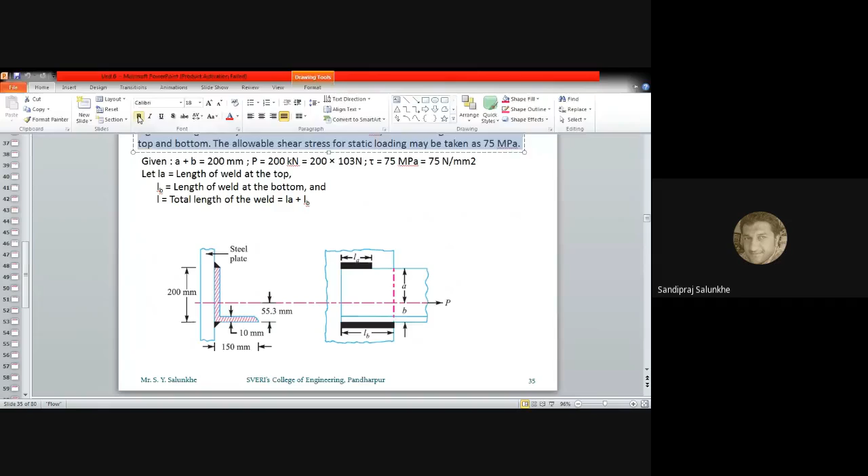So in the statement it has been stated that a 200 by 150 by 10, that is 200 length, 150 width and 10 millimeter thickness angle is to be welded with the steel plate by fillet welds as shown in figure. Here it has been shown. If the angle is subjected to static load of 200 kilonewton, find the length of weld at the top and at the bottom.

That means we have to calculate LA and LB. The allowable shear stress for the static loading may be taken as 75 megapascal, that is, the allowable shear stress of that welding is 75 megapascal, and we have to calculate what will be the length of that weld.

Now here it has been given that A plus B, that is nothing but total width, is equal to 200 millimeter of that angle, whereas the P, that is load which is applied axially, is 200 kilonewton, that is 200 into 10 raised to 3 Newton. Allowable shear stress is 75 megapascal, that is 75 Newton per millimeter square.

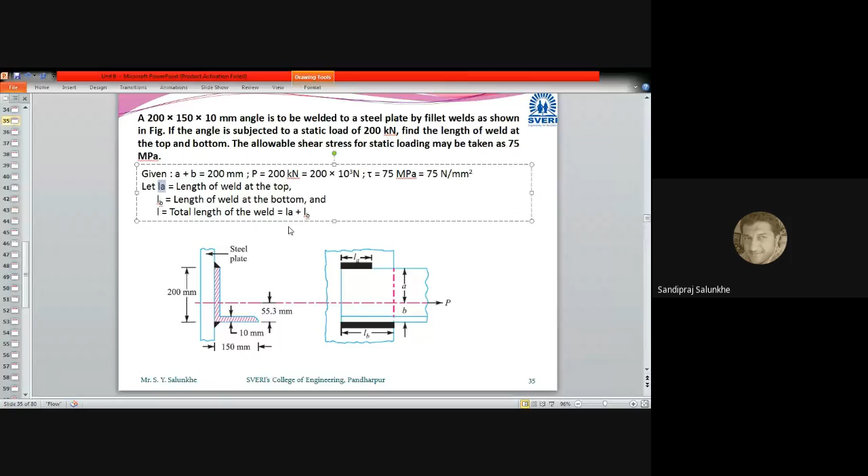Now we consider this LA as a length of weld at the top and LB as a length of weld at the bottom, and L will call it as LA plus LB. Now this is the schematic diagram of that stated problem. In this diagram we have to calculate LA and LB, or if possible we'll calculate LA plus LB, and from that we'll calculate LA and LB by considering any one.

Now we'll take the thickness of that angle as 10 millimeter, as it has been stated in the problem. Therefore, the size of weld which we have to calculate, S is equal to 10 millimeter. And later on, we will calculate the T, that is nothing but...

Is there any problem? Sachin Kengar, Sachin Kengar, can you unmute yourself? Hello, Sachin Kengar. Can you unmute yourself? What is your roll number, Sachin Kengar? Hello? Can you hear me, Sachin Kengar? Okay, later on I will come to know.

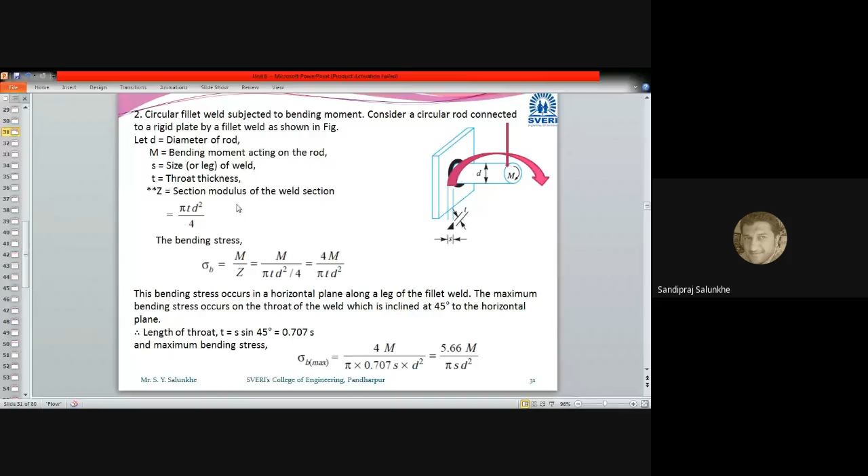So when we are going to calculate this T, that is the throat thickness.

So we have to calculate the parallel weld, and the formula which we have derived for the parallel weld is that P is equal to 0.707 into S, size of weld, into L, total length of that weld, into shear stress. That is, stress is equal to force divided by area. Area which we are going to consider is T into L, that is throat thickness into length of that weld, and allowable shear stress is tau.

So when we are going to...

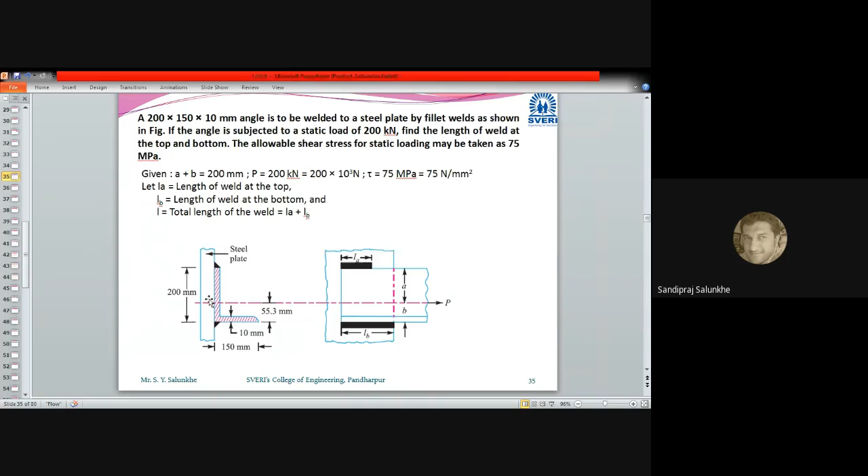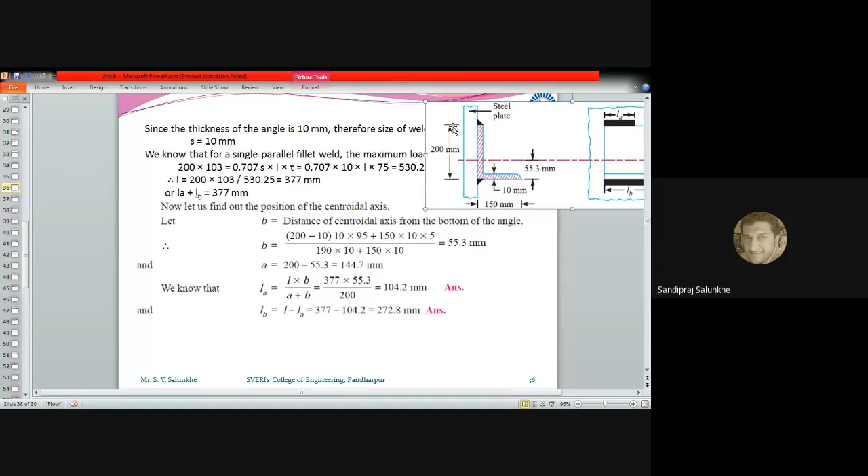I'll take this diagram for reference on the next slide. So this B we have calculated as 55.3, and A can be calculated from the higher end, 200 minus this 55.3. So this A and B we have found out, that is we have located the centroid.

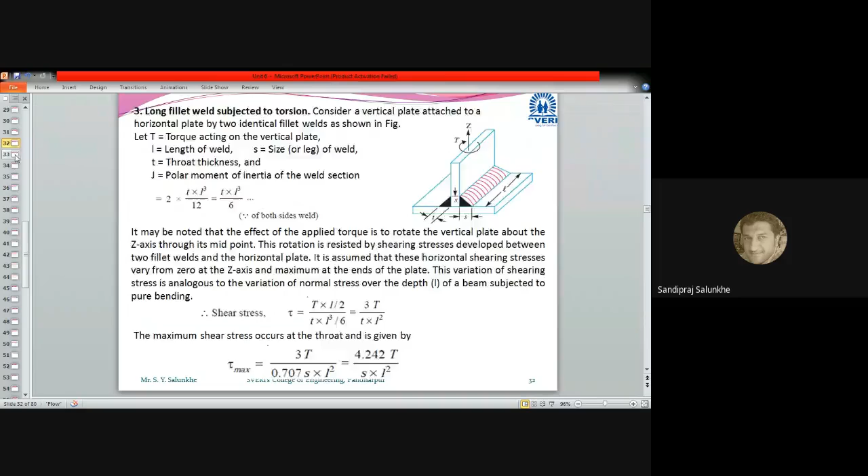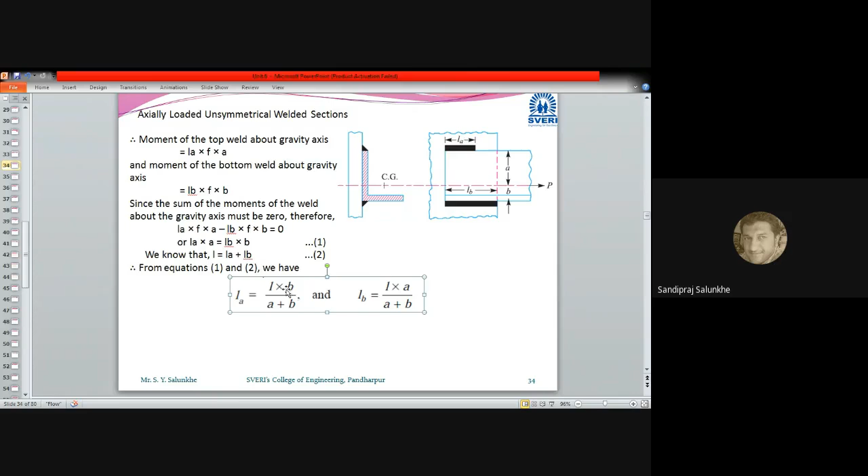Now we know that at the centroid, we are going to calculate LA, because LA is calculated by means of these two formulas: LA into A is equal to LB into B, and L is equal to LA plus LB. From these two formulas, we derive LA and LB in terms of L, A and B. So we'll use this to calculate LA, which is L into B divided by A plus B.

So LA is calculated as 104.2 millimeter. Now for LB, we subtract from the total length which we calculated as 377 millimeter. So 377 minus 104.2 millimeter gives 272.8 millimeter. So LB is also calculated, and that is the length of weld required to sustain the 200 kilonewton load on this angle.

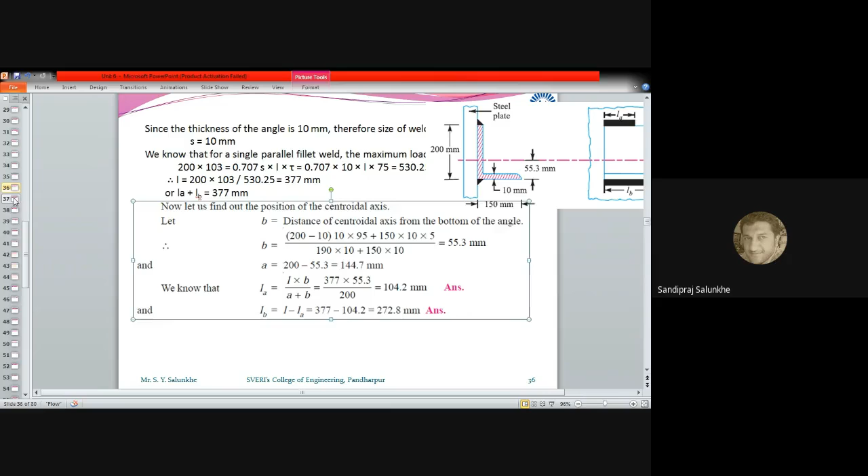Any doubt? No, sir. Okay, then we'll go further.

We are going to consider the case of eccentric loading on the welding joint, because we have seen this eccentric loading in case of bolted joint, and there we calculated how to find the dimensions of that bolt. Now here also we consider such a situation where eccentric loading is created on that welded joint. So eccentric loading gives rise to both types of loading, that is bending in that welded joint as well as tensile or shear in that welded joint.

For that, we are going to use two theories: maximum normal stress theory and maximum shear stress theory. This maximum normal stress theory means when normal stresses exceed, this welded joint is going to break.

So in that case, when the welded joint is subjected to bending as well as shear, bending is basically compression or tensile. But if it is subjected to bending stresses, then the maximum principal stress is calculated as sigma max equals bending stress by 2 plus half of the square root of bending stress squared plus 4 times shear stress squared. From this formula, we can calculate the maximum principal stress, the maximum normal stress which will get induced in that weld, and this stress we have to take for the design.

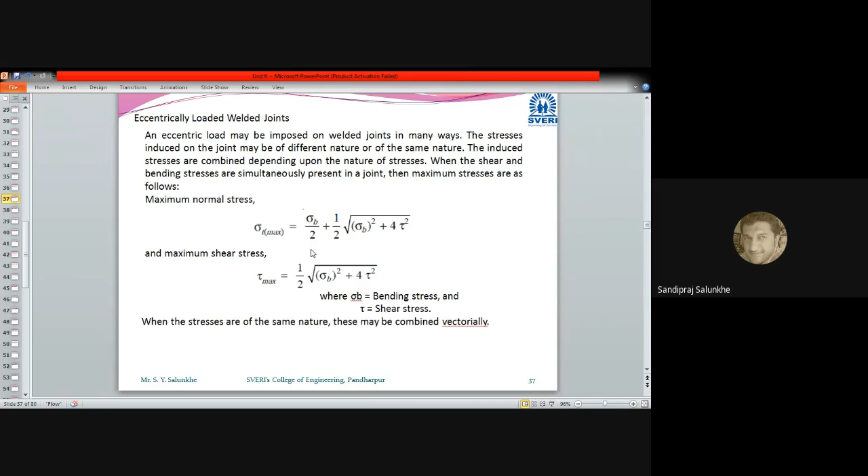Now we will consider these two theories, and we will calculate the strength of that welded joint.

Now we will consider one case first, where the T-joint is fixed, and one end is subjected to eccentric loading. On that point, load P is applied. This is the front view and this is the top view of the same diagram - not a butt joint, just two views. Load is applied in the vertically downward direction.

In this case we have to calculate the strength of this welded joint by considering S, the size of the weld, T the throat thickness, and L the length of the welded joint. If the load is acting at a distance E from the welded joint, it will create bending moment as well as shear.

So the bending moment created in this joint is in this nature because of the load P. This bending moment will be generated, and the shear which will be generated will be direct shear in this welded joint. We'll calculate the bending moment, bending stress and shear stress first, and later the maximum principal stress - that is maximum tensile stress - and maximum shear stress. We will check it for both.

Now this direct shear and bending stress are generated because of the eccentric load, and bending moment equals P into E. So here we want to calculate the throat area, that is the welded area: throat thickness multiplied by length of the weld, multiplied by 2, because welding is done from both sides. If used from the upper side only, we take T into L; if from the bottom side only, we use T into L only. As welding is done from both sides of the plate, 2 is used here. So T into L into 2, that is 2TL, is the area of this welding joint which we take for calculation.

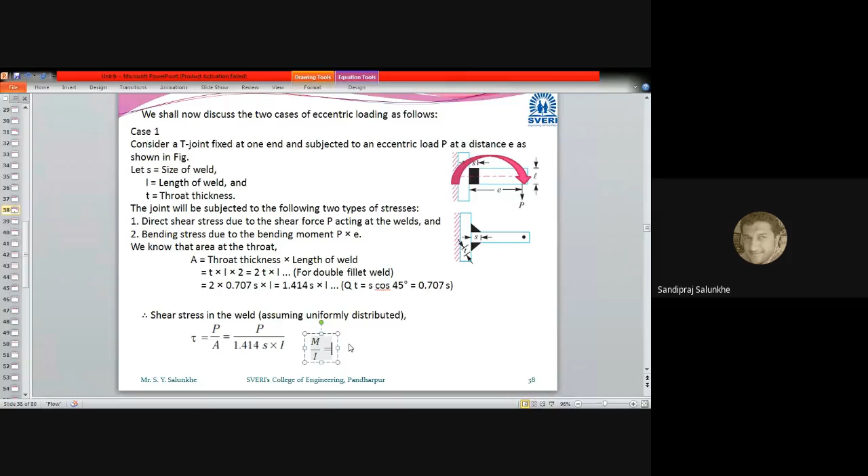Now this shear stress is considered, and it's designed for the maximum stress. Likewise, we can calculate bending moment also. Sigma B is equal to - using the basic equation M divided by I equals sigma B divided by Y - by means of this equation, we can calculate the value of sigma B also.

Sigma B is equal to M by I. Here you have to consider the moment of inertia for the welded section only, that triangular section. And Y is the distance from the neutral layer, or upper layer, the thickness of the welded joint, which will be T by 2. So sigma B is equal to M by I into Y.

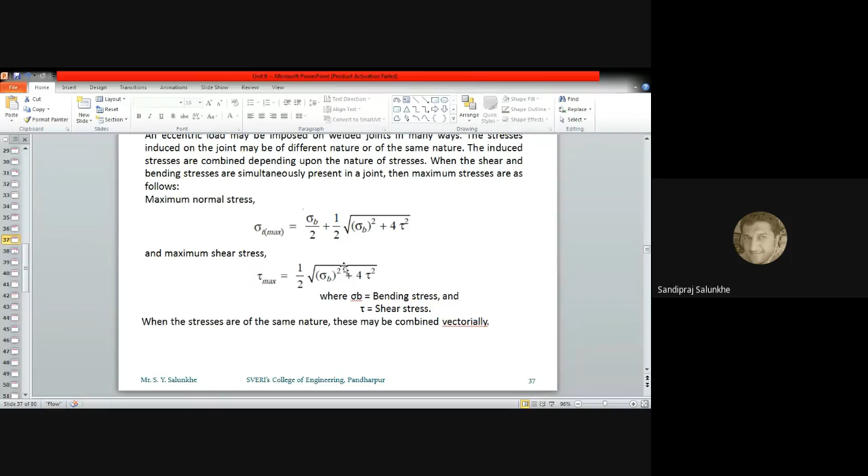By means of this, we can calculate sigma B, and later calculate the maximum bending stress. By means of these two formulas, sigma B and tau, we can use the equations to calculate maximum normal stress and maximum shear stress. For both these cases, we can calculate the thickness of the weld, that is throat thickness, as well as the length of the weld.

Now we are going to consider the second case for eccentric loading. In that case, this plate is subjected to eccentric loading.

This is the front view of that plate, one vertical plate and a second one horizontal plate is welded to this vertical plate. This horizontal plate is loaded by means of load P at a distance E.

This distance is measured from the centroid. Here you can consider this G, which is nothing but the centroid of this welded area. Now this centroid, how to calculate it, is shown in this table that we'll see later on.

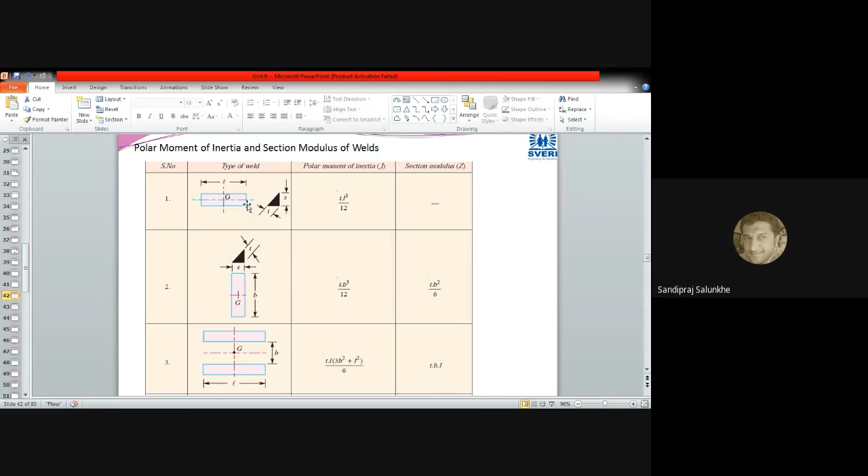If only one type of weld is used, a vertical lap joint, then horizontal parallel, two lap joints are there, two welded parts are there. How to calculate CG for all these types of joints, that we will see in that table.

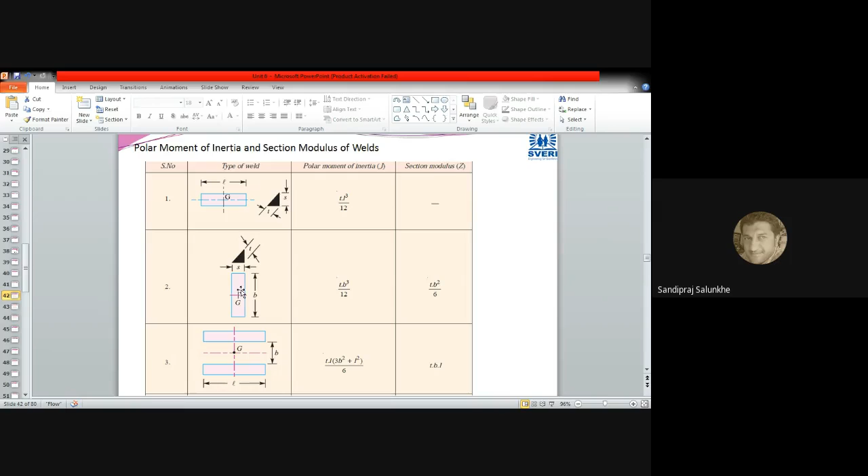But here you can consider that the CG of that total weld is considered at G. Now this eccentric distance is measured from this CG, and that is equal to E.

Now due to this P, direct shear will be created and bending stress also will be created in this welded joint.

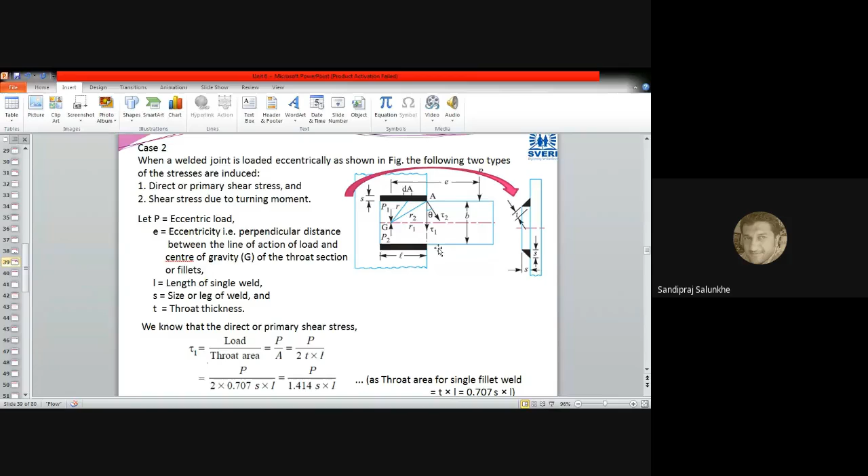Bending will be created like this. And shear, because of the load P which is acting in vertically downward direction, shear will occur in this welding strip and in this welding strip also. So this case will become combined stressing, that is bending as well as shear.

Now we have to use the same principle, that is maximum normal stress sigma T max or maximum shear stress tau max. From that we have to calculate the thickness and all other dimensions of this welded part.

So this direct or primary stress which we are going to consider here is the shear stress tau, and bending stress. First of all, we'll calculate the direct shear.

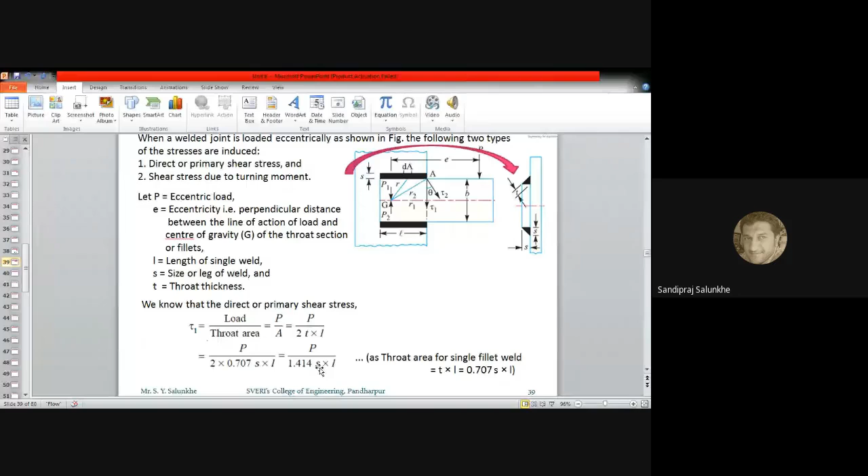This direct shear stress is given by load divided by throat area. Throat area is 2T, 2 because two strips are used, T into L. Now if you want to put the value of this T in terms of S, it will be 0.707 S. So 2 into 0.707 is 1.414, so it becomes 1.414 S into L. So this direct or primary shear stress we have calculated.

Next, since the shear which has been produced due to the turning moment, that is T, which is equal to P into E, that is the bending moment which is created, it will also create shear in that weld, and we'll call it tau 2.

This tau 2 which we are going to calculate, that is the secondary shear because of the eccentricity, is acting perpendicular at each point of this weld, which we are going to draw from the CG.

And this shear stress which is created in this all welded joint, if you are going to take this tau 2, that is the shear stress generated, or the moment about this CG of all the forces which are acting because of the eccentricity, that moment should be zero.

Otherwise, what will happen? If the moment will not be zero, this will be in an unbalanced condition. Now if the load P is sustained, that is, no motion is created, it means that the point at which we are going to take the moment about the CG, that should be zero.

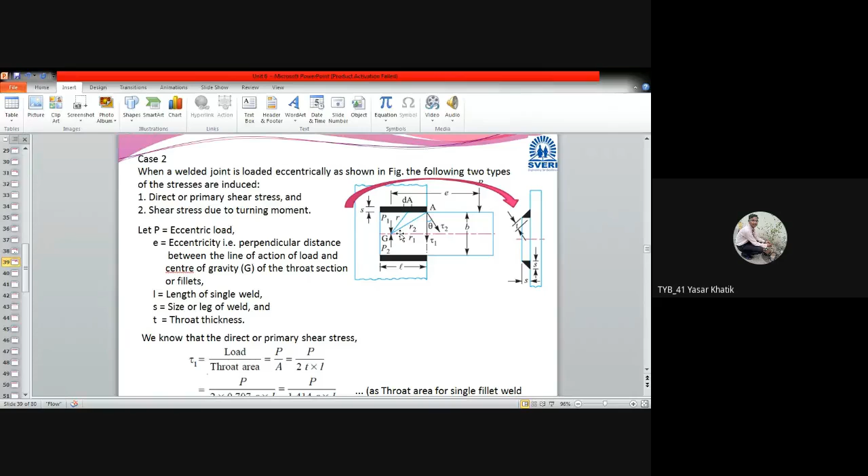So moment at G of all these forces which are acting should be equal to zero, and by means of that we can write the equation, that is tau 2 divided by R2 is equal to tau divided by R. R is nothing but the radius, the distance from the CG to the forces which are generated in the welded joint. So that is constant because the moment about CG is equal to zero.

So this tau can be calculated as tau 2, the total shear stress, is equal to tau 2 divided by R2 into R. If you are able to measure one distance, and that can be measured because CG is already calculated, from that CG we can calculate the distance of the point, this A point. This distance can be calculated, and later it can be summed, and the average distance of each point from the CG can be calculated.

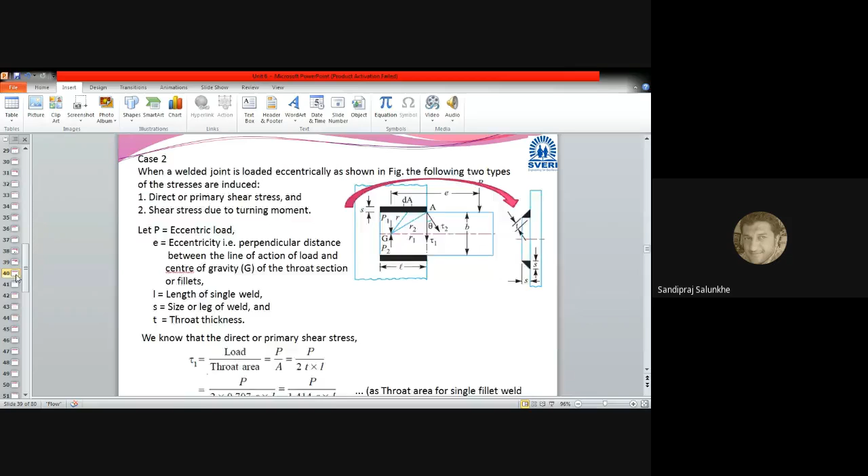For that, we are going to use this tau 2 divided by R2 into R. Now this tau 2 is the shear stress at the maximum distance, and R2 is the maximum distance from the CG. And tau is the shear stress at any distance R where you want to calculate it.

Now considering, design has been done always for the maximum shear. Now by considering a small section of the weld having dA as an area, this A point which we have considered, that small distance varies with respect to the distance from the CG. That's why dA will be considered as a small area at a distance of R from the CG.

This later on can be integrated for calculating total shear. So the shear force acting on that will be tau, shear stress, multiplied by area, that is dA. And this turning moment of this shear force which we have calculated, that turning moment will be tau into dA, that is the force, multiplied by radius, that is the distance from CG, R.

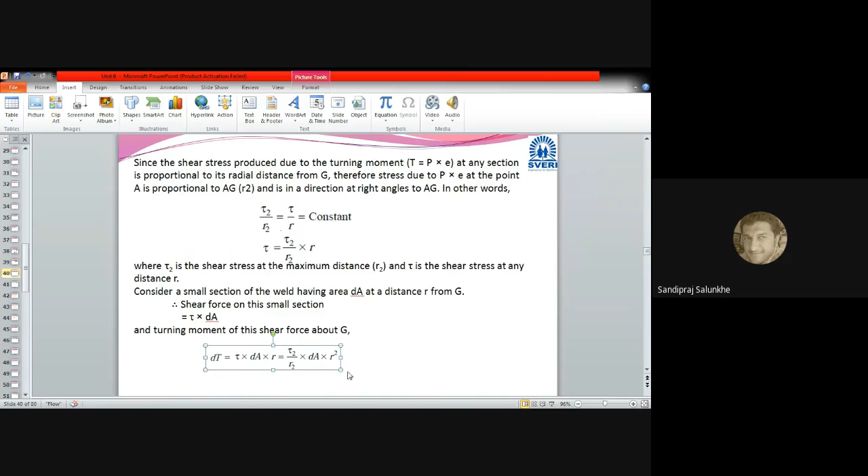And if you want to calculate the total moment, T is equal to P into E, and that is equal to the total moment which has been created, which has been restricted because of the weld. So, integration of tau 2 divided by r2 into dA into r square.

Now this tau 2 and r2 are constant. These are the distance of the maximum, or the point which is having maximum shear stress. And dA is the variable. We are going to take the whole area, and r is nothing but the distance of that dA from CG, so r is also variable. So here we are going to take this dA into r square, that will be considered as J, polar moment of inertia of that throat area about CG.

Now here we are going to calculate that polar moment of inertia about the CG of that total welding section. That will be calculated here.

Now when we are going to consider this bending moment as well as the shear stress, shear stress due to the turning moment is calculated as T, that is M bending moment, into R2, the distance of maximum shear stress where it is generated, divided by J. So this value tau 2 from this equation where we have just derived it, tau 2 is equal to R2 we are going to take to this side and J to this side. That's why the shear stress, maximum shear stress, is calculated in that welded part.

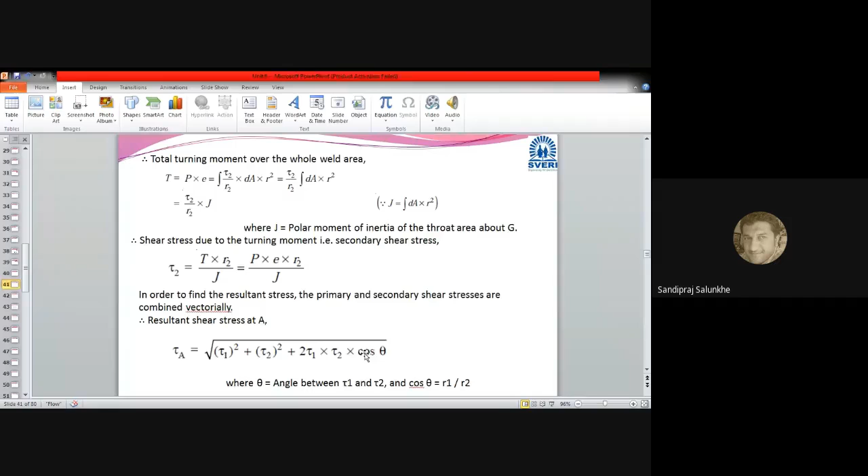This is calculated as tau 1 square plus tau 2 square, that is primary shear stress square plus secondary shear stress square, plus 2 tau 1 into tau 2 multiplied by cos theta, where theta is the angle between tau 1 and tau 2, that is primary shear stress and secondary shear stress, and normally it is calculated as R1 divided by R2.

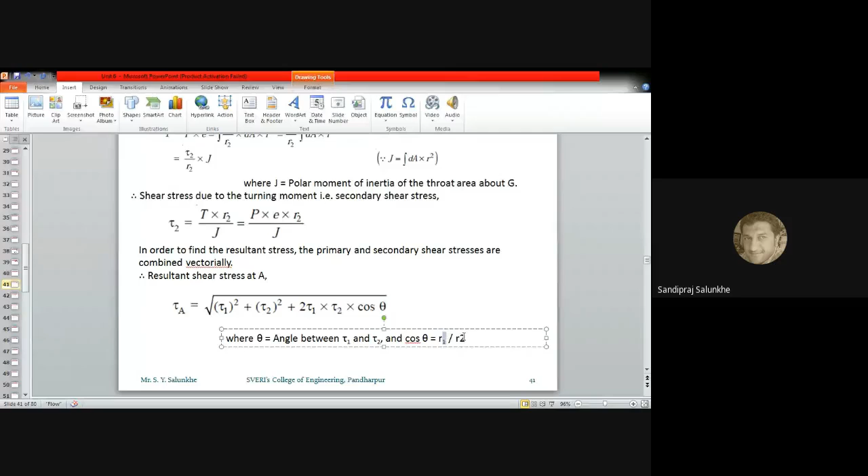R1 is the smallest distance from the CG of any welded point, and R2 is the maximum distance of this point A.

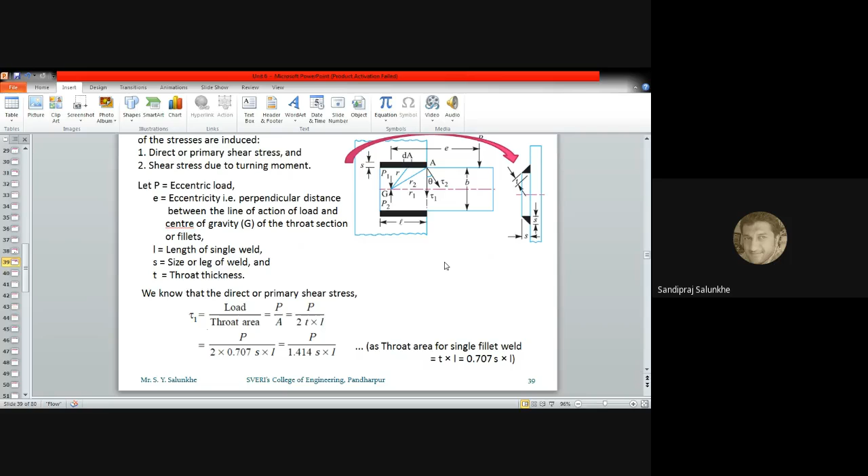Any question? No, sir. Okay, no problem.

Now, how to calculate the polar moment of inertia of all welding sections, that has been mentioned in this table. This table can be referred, but it will not be provided to you at the time of examination. This we have to memorize by heart.

So when we are going to calculate the polar moment of inertia about this CG point of this rectangle, then it will be BD cube by 12. B is the thickness and D is the depth considered here, and strength of weld is calculated in horizontal position. That's why it is taken as BD cube by 12, that is T into L cube by 12.

Likewise, if the vertical rectangle is there, if two parallel rectangles of welded joints are there, we are going to consider only these welding strips, and we are going to calculate the polar moment of inertia of those strips.

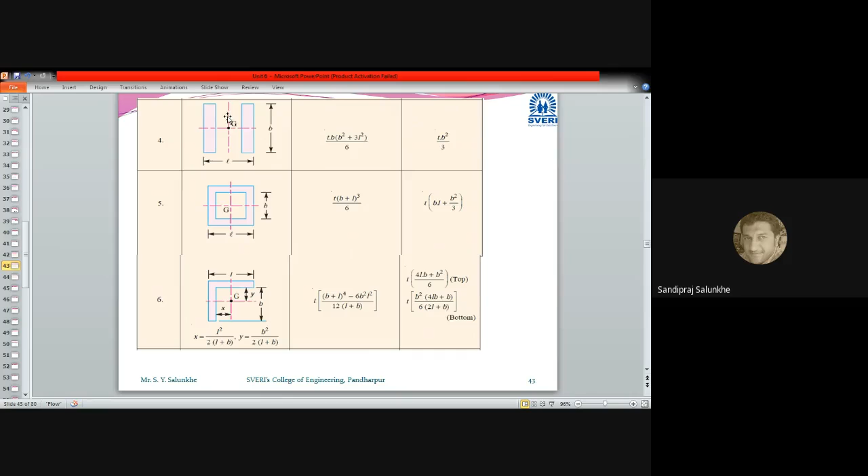About the CG - these are what we can call regular shapes. But if the irregular shape is there, then it is difficult to calculate this CG. For that, you have to divide that irregular shape into regular shapes, and then first calculate CG, and afterwards polar moment of inertia.

Now, when vertical strips are there, how to calculate it? For total rectangular type of welding, how to calculate it? L type of welding, inverted L, C type of welding if we are going to connect the C channel to a plate, and if we are going to connect any rod to the plate - for all this how to calculate CG and polar moment of inertia has been mentioned here. You can refer this table and calculate it.

Now this is one example. Such type of examples have not been asked in our syllabus. But we will see one example by means of which we can calculate the strength of this weld, which is of eccentric type of category.

I'll read this statement. A welded joint as shown in figure is subjected to an eccentric load of 2 kilonewton. Find the size of weld if maximum shear stress in the weld is allowed as 25 megapascal.

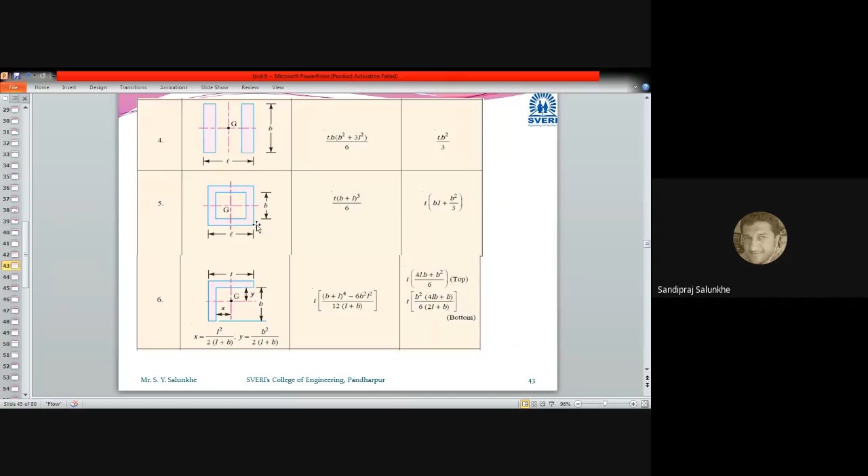This polar moment of inertia Z, or sectional modulus Z, we have to calculate for this type of welding, which you can take from table. Now this type of loading is there, that is T L, S L square divided by 4.242, where T is the thickness of that weld. You put the value of L as 40, and it will be in terms of S, that is 377 into S millimeter cube. That is section modulus.

Now this bending stress is calculated as M divided by Z. You know Z is nothing but I divided by Y, section modulus. The bending stress is calculated by means of bending moment divided by section modulus, and that will be in terms of S again.

We know that maximum shear stress is calculated as tau max equals 1/2 of square root of bending stress square plus 4 times shear stress square. That is maximum shear stress theory. In this case, we put the value of bending stress as well as shear stress in terms of S, and allowable shear stress, the maximum shear stress, is 25 newton per millimeter square, 25 megapascal as given. We'll keep this 25 as it is, and we can calculate S.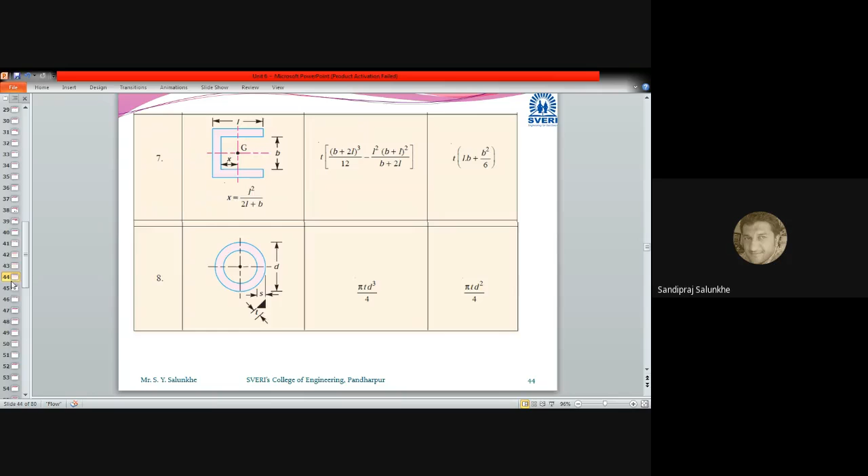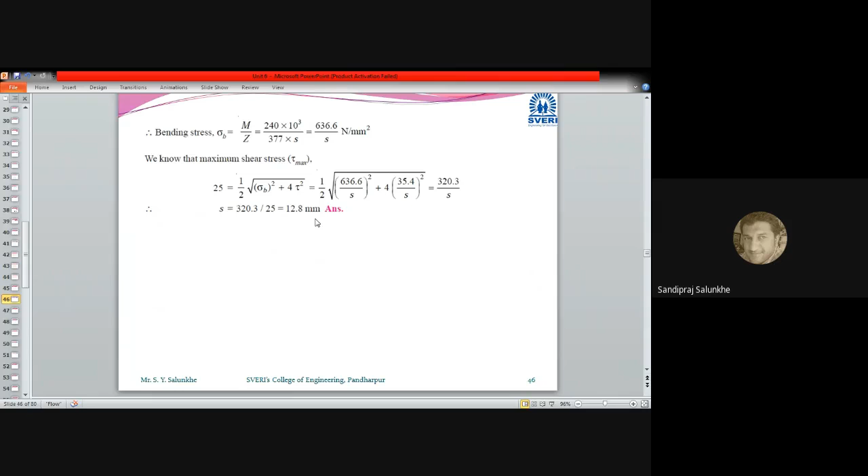That is the size of the weld, and later we can calculate the throat thickness also from that if required. And S is equal to 12.8 millimeter, the size of weld which we have to keep as 12.8 millimeter.

Any question? Hello? Do you have any question? No, sir. Okay.

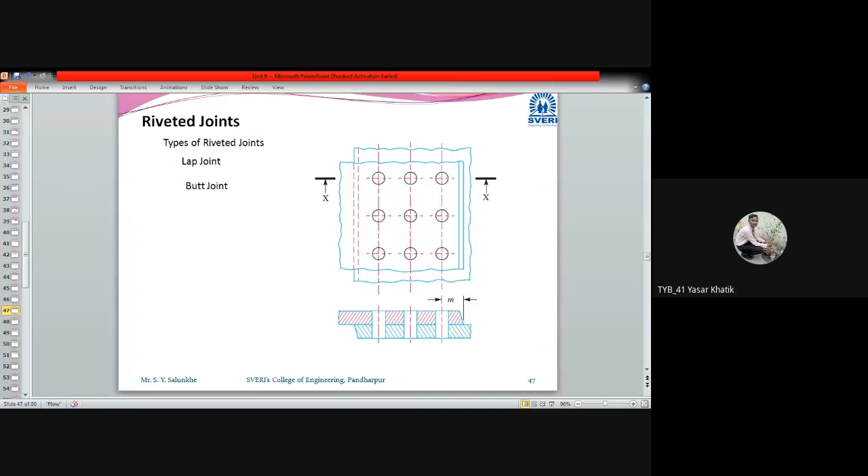Now we'll stop here. Only this riveted part, that is again the introductory part of the riveted joints, that we'll see in the next lecture, and we'll be in position to finish this total syllabus.